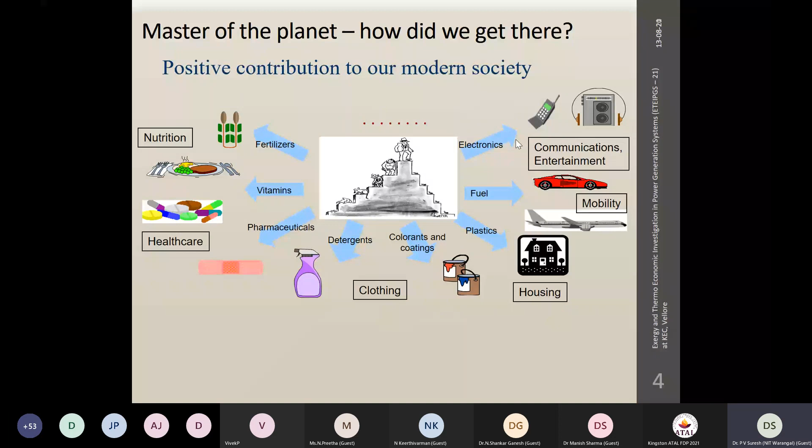And then in terms of automotive mobility, we have developed cars, airplanes, and all those things. And then we have excellent communication among us—there are so many things we have developed in communication and entertainment. So if you take all this, there is a good amount of positive contribution to our modern society.

So now, because of all these contributions provided by humans, we are on top now. But then what are the problems, or what are the challenges that are being faced by us now? How do we face those problems? Let us quickly look at those problems.

It is projected that there will be an increase in energy demand by 3.5 times, an increase in electricity demand by 7 times, and an increase in water demand. Because of all this, it is also projected that there will be an increase in greenhouse gas emissions.

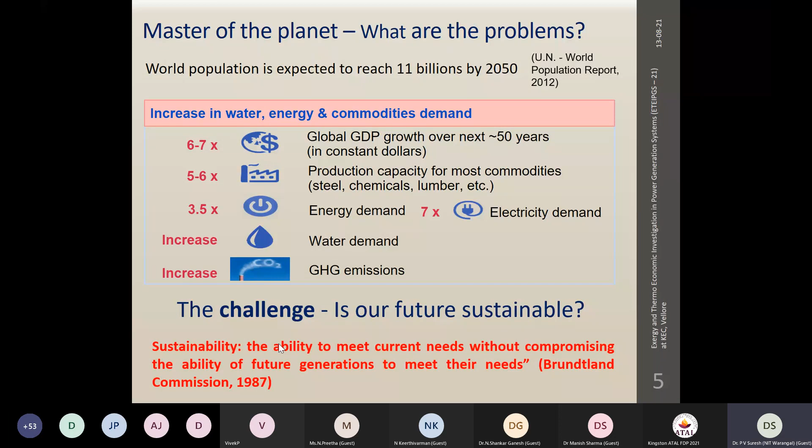Now coming to this point, I'll be mainly focusing on the greenhouse gas emissions and what remedies we can address. Climate change is a major issue which requires immediate attention and suitable remedial measures.

We all know the entire globe is getting warmed, and because of that there are so many consequences. We need to give immediate attention to this problem. CO2 is the major greenhouse gas which adversely affects the environment, though there are many greenhouse gases.

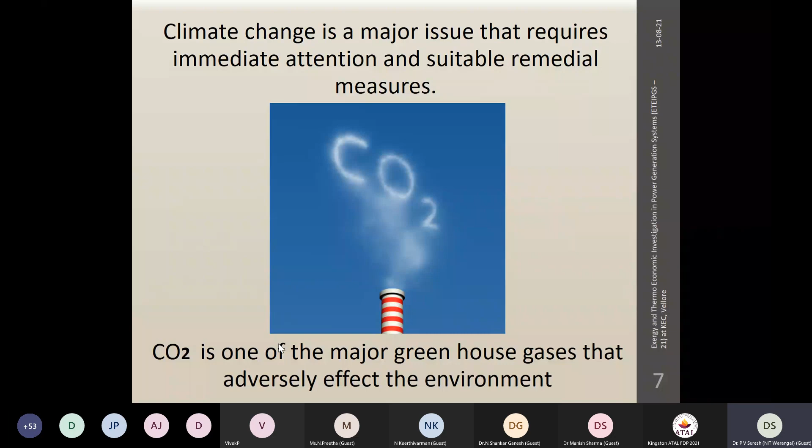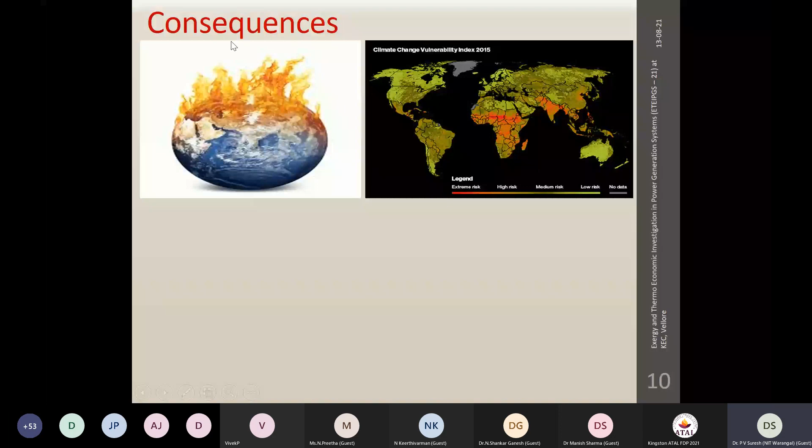So now moving on, we all know there are consequences of global warming. I'm not going to tell you what global warming is, we are all aware of that. The consequence of global warming is that the temperature of the earth is getting increased day by day.

If you see, these are the surface air temperature contours from 1960 to 2060, which are projected to 2060, and this is a climate change vulnerability index. Unfortunately, India is also coming into this region of red, or more extreme risk to high risk zone.

We can see 17 of the top 18 warmest years occurred since 2000, and 2016 and 2019 are the first and second warmest global years on record since 1880. Unfortunately, we have seen those years, and we should not wish our future generations to witness these kinds of effects.

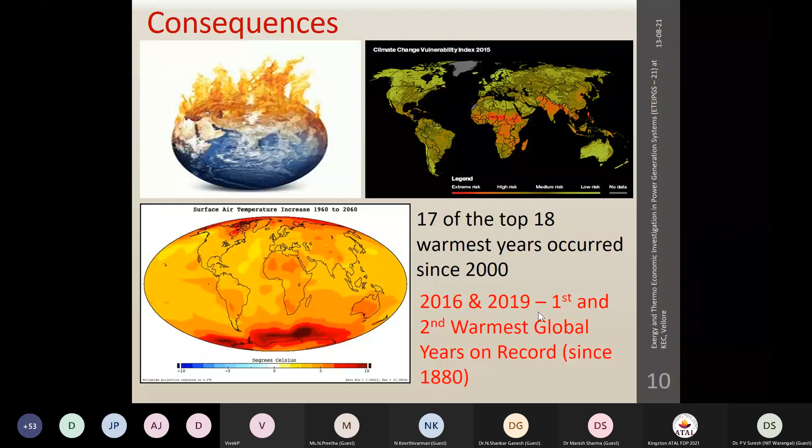And what are the ill effects of this global warming? These are some examples: we have seen extinction of species, droughts, floods in some areas, and uneven seasons. The probability that these changes occurred by chance is virtually zero.

But because of all our acts, because of greenhouse gas emissions into the atmosphere and because of our problems, the entire nature is getting affected, and all the species are getting affected.

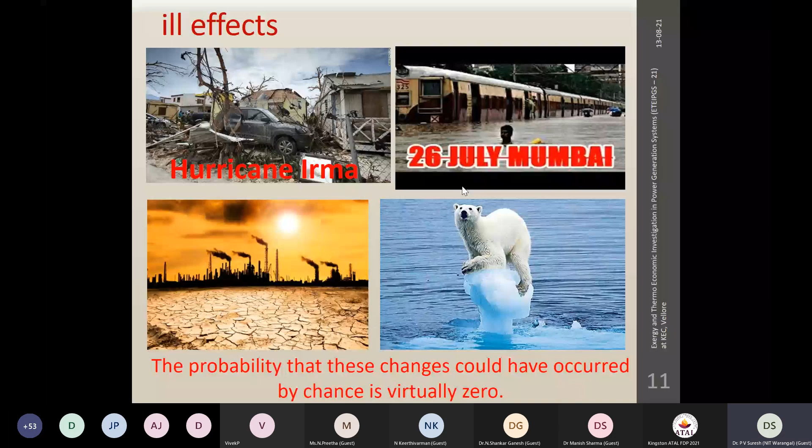Global warming by greenhouse gases has become a major concern worldwide due to its adverse effect on climate change. Because of the seriousness of this problem, all the countries met in 2015, from November 30th to December 11th, in Paris, in a conference of parties, the COP21 conference. About 195 countries voted to adopt a historic agreement on climate change.

So what is that agreement? They wanted to limit global warming to 2 degrees Celsius by the year 2100. So with compromise and cooperation among all these parties, the countries which met in COP21, this agreement was reached.

Hello, yeah. Any issue?

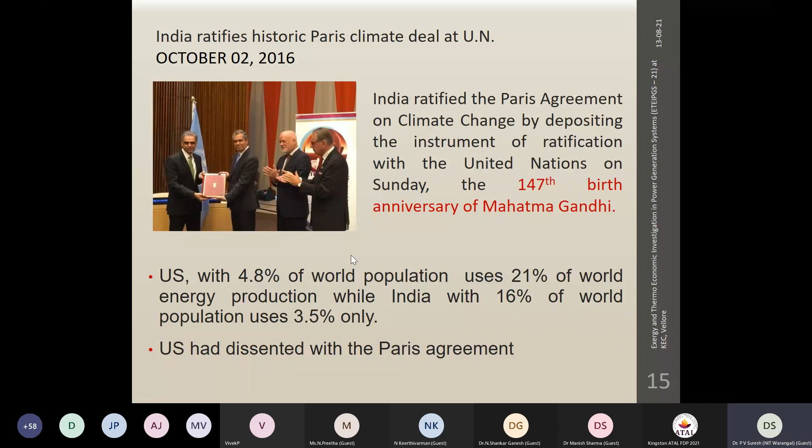So now, in order to achieve this target CO2 emission level of 450 ppm by 2100, how do we achieve these targets? A single strategy may not be sufficient. We need a multi-pronged strategy, which includes application of carbon dioxide capture, sequestration and utilization, CCS and CCU technologies. We have to bring CCS and CCU into reality and then utilize them.

We also look for utilization of alternative energy sources other than coal. We should depend on alternative energy sources such as solar energy, wind power, geothermal, and also renewable energy sources such as biomass and biofuel. There is a huge thrust on going for these energy sources, but they have their own limitations still.

Another strategy is the improvement of process efficiencies to reduce energy consumption. For already existing processes and equipment, we should try to improve the efficiency so that they'll consume less energy. If they consume less energy, then that energy can be utilized for other purposes. So we should design efficient processes that are energy efficient.

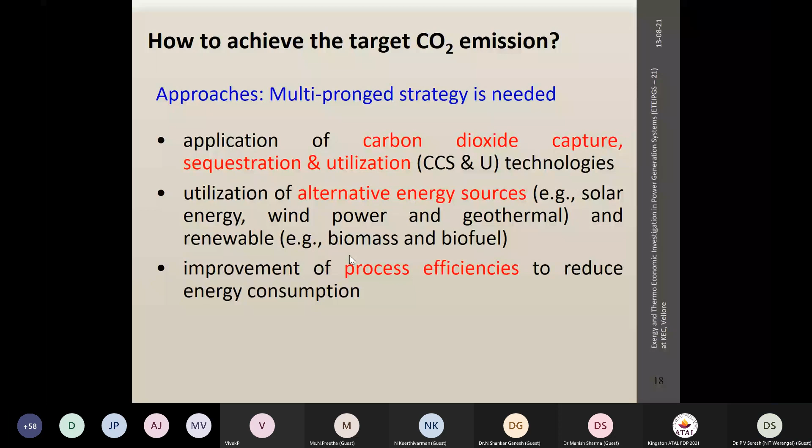So now the motivation for our work is like this. At present, India has vast coal resources, amounting to about 8.3% of the total global coal reserves, and about three-fourths of electricity was produced from coal for the year 2016 to 2017.

As on 31st March 2016, the estimated reserves of coal were about 308 billion tons, with an addition of 2.2 billion tons over the last year. So there is an increase in coal reserves also, and we are leading in coal. We have the highest coal reserves in the world also.

Coal deposits in India are mainly confined to the eastern, southern, and central parts of the country. If you look at the statistics of electricity generation by sources in India during this year, the major chunk of electricity generation is by coal, around 76%. All other renewables and alternative energy sources have contributed around 25% only, less than 25%.

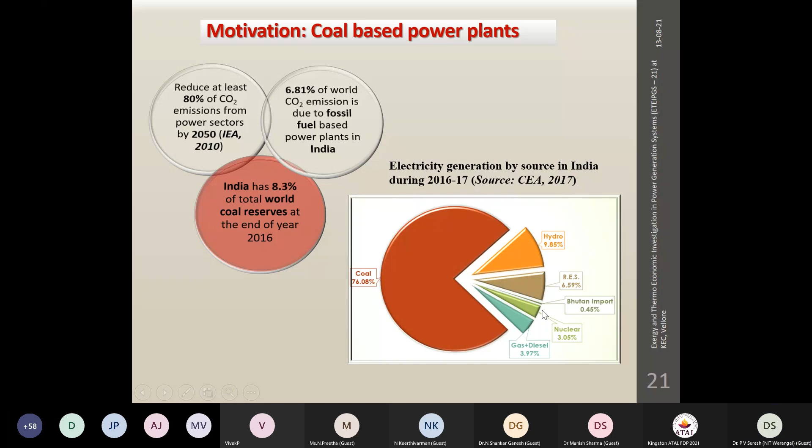As we know, there is carbon content in the coal, so obviously there will be release of CO2. So how do we address this? How do we capture this CO2 that is released from the coal-fired power plants?

At present, there are 3 conventional CO2 capture technologies: post-combustion, pre-combustion, and oxy-combustion. The first one is post-combustion.

What we do here in post-combustion capture is, from the combustion we get flue gas, and the flue gas contains CO2. This CO2 will be captured using post-combustion capture techniques, and then the captured CO2 will be either compressed and stored, sent for sequestration, or if possible, utilized. So after combustion, whatever CO2 is released from the flue gases, we try to capture there. It's a post-combustion technique. These post-combustion capture techniques or units will be integrated with conventional, existing coal-fired power plants.

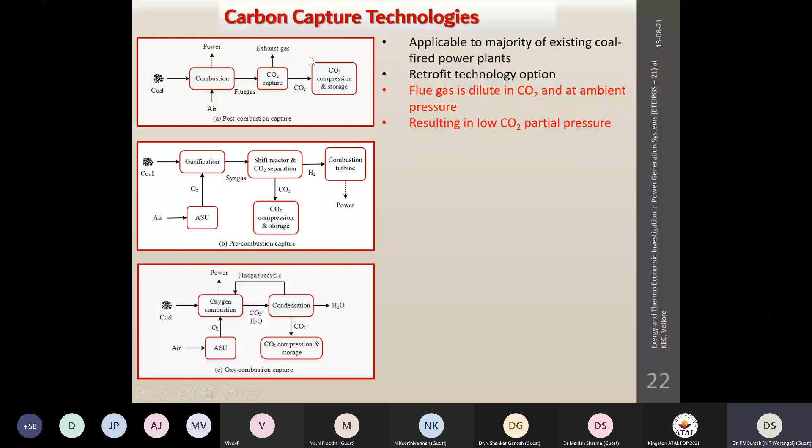So it's a retrofit technology option. But the disadvantages are flue gas is dilute in CO2. So the CO2 that we get from here is in dilute form, and it is at ambient pressure. So it will be very difficult to capture CO2 from this, and it is very energy intensive. This results in low CO2 partial pressure, because the concentration of CO2 is less, the partial pressure of CO2 is less. Because of this, it is an energy intensive or expensive process. You can either use absorption techniques or adsorption techniques here, so many techniques are being attempted.

Next, pre-combustion capture. In pre-combustion capture, what we do is combust coal with pure oxygen. There will be a gasification step here. Coal will be gasified by supplying pure oxygen, and the syngas we get from this will be sent to a shift reactor, where the CO in the syngas will be converted to CO2, giving CO2 and H2. You can easily separate CO2 from H2 using any CO2 separation unit, and then hydrogen goes to the combustion turbine for power production, and this CO2 will be sent to sequestration after compression.

So here you'll get synthesis gas concentrated in CO2 and at high pressure. That's the advantage, and it is applicable mainly to new plants, not existing plants. As few gasification plants are currently in operation, the barriers to commercial application of gasification plants are common to this capture technology also. And the cost of equipment and extensive supporting systems required are disadvantages.

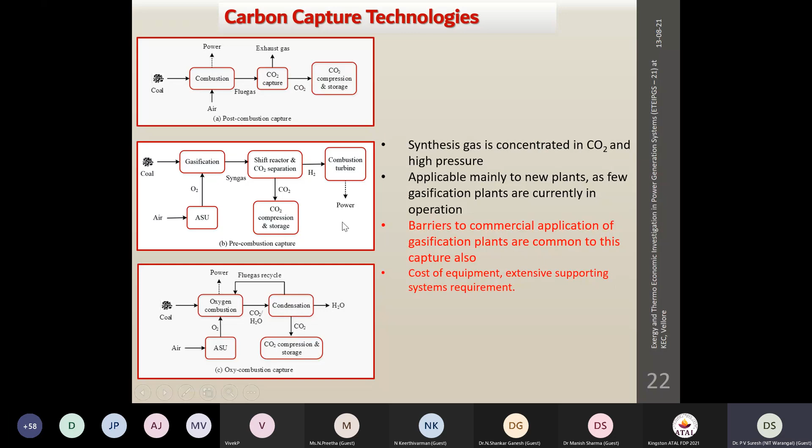So that's the disadvantage. Another capture technology is oxy-combustion. Here you require pure oxygen. How do you get pure oxygen? Pure oxygen is not readily available, you have to either get it from air or from water. So again, you require an air separation unit, which is again an energy intensive process.

So another capture technique is oxy-combustion capture. Again, this requires pure oxygen, and the coal will be directly combusted here using oxygen. So there won't be any syngas production or gasification here. It is directly combusted, and you will get CO2 and steam, and there will be a rich form of CO2 coming out from the oxy-combustion unit. This can be easily separated, as the steam can be condensed and CO2 separated. This CO2 can be sent to compression or sequestration and further utilization.

So it is very high CO2. The advantages of this technology are very high CO2 concentration in the flue gas, and it's a retrofit and repowering technology option. The downside, you require a large amount of oxygen here, and large cryogenic O2 production requirement may be cost prohibitive. It is a costly and energy intensive process, and cooled CO2 recycle is required to maintain temperatures within the limits of combustor materials.

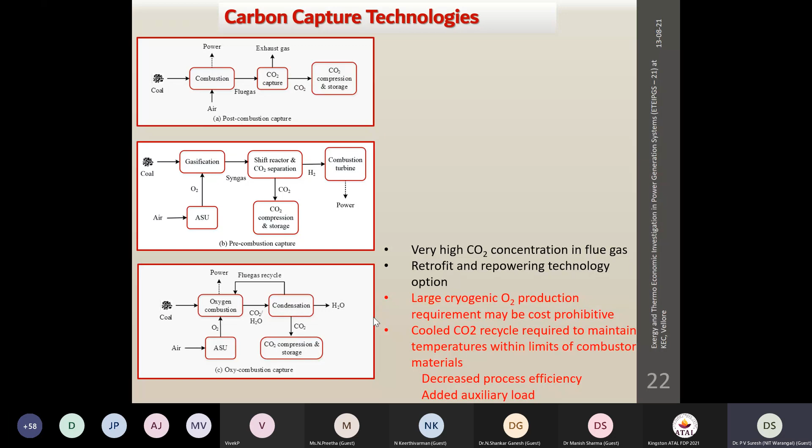So though these technologies result in attractive CO2 reduction by capturing them and not releasing into the atmosphere, they are associated with huge energy penalties. The post-combustion capture for conventional coal-fired power plants results in around 7 to 10% energy penalty for 85% CO2 capture efficiency. Whereas pre-combustion and oxy-combustion, the other two technologies for conventional integrated gasification IGCC plants, have resulted in around 7% and 9% energy penalties for CO2 capture efficiency. So they are somewhere around 7 to 10% energy penalty in the energy efficiencies.

So what we need is a CO2 capture technology with lower energy penalty, and that will become a more viable option than these three technologies. In this context, chemical looping combustion is very attractive, because it captures most of the CO2 emitted from the power plant at a lower energy penalty compared to these conventional CO2 capture techniques. So chemical looping combustion shares the advantages and disadvantages of these two capture techniques, post-combustion and oxy-combustion capture.

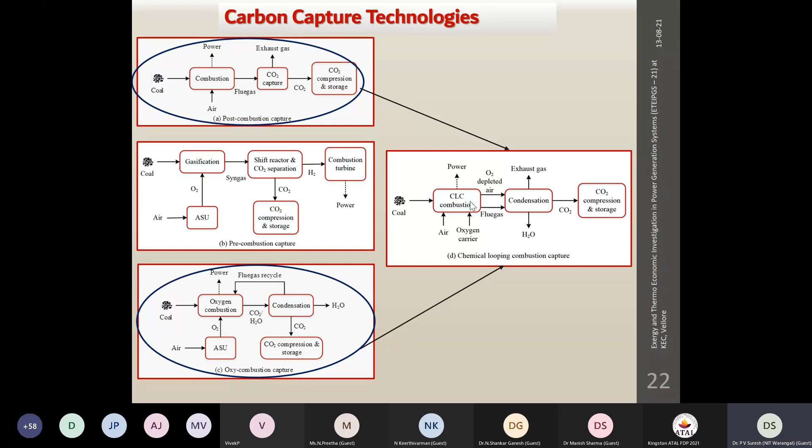The reduced metal oxides, so Fe2O3, because of release of oxygen in the fuel reactor, becomes Fe3O4 or FeO, and these reduced metal oxides are sent to the air reactor, where air oxidizes them back to Fe2O3. These Fe2O3 are then sent back to the fuel reactor.

So you get nitrogen, avoiding NOx and other gases along with the combustion products. That's the main advantage. There is no direct contact between the fuel and air here; they are in indirect contact. Because of that, you get a concentrated CO2 stream along with steam, which can be easily separated. That's the main advantage of this technology.

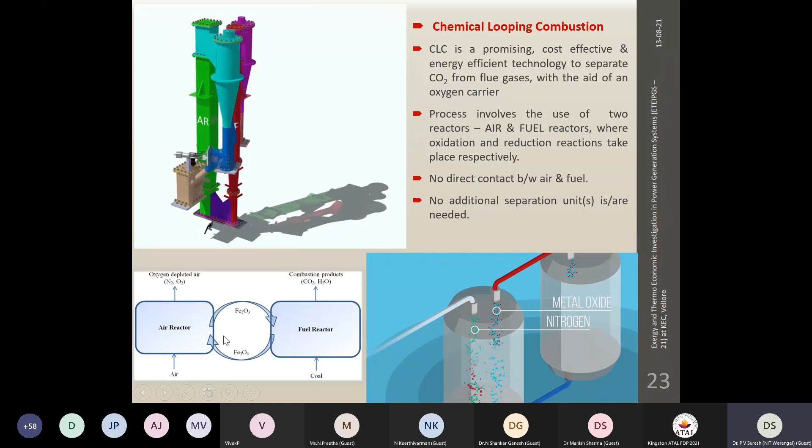The process involves the use of two reactors, air and fuel reactors, where oxidation and reduction reactions take place respectively. In the fuel reactor, reduction reactions take place, and in the air reactor, oxidation reactions take place, and there are no additional separation units required in this process. I hope this is clear.

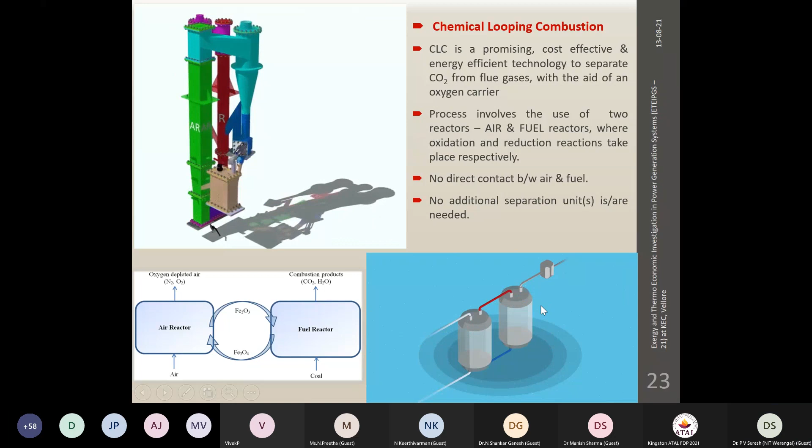So that's the CO2 capture technique we use here. As I said, it is very attractive and captures almost 100% of the CO2 from the power plant at a lower energy penalty compared to previous techniques. I'll also show you some analysis we've done after integrating this technique, to see how much energy penalty there will be.

Moving on, we have also tried to integrate this CLC, chemical looping combustion, under three steam boiler conditions: subcritical coal-fired power plant, supercritical coal-fired power plant, and also ultra-supercritical coal-fired power plant. We all know our Indian coal has a lower calorific value compared to some low ash content coals abroad.

Our coals are mainly high ash content, which reduces the net efficiency of the power plant as compared to low ash content coals. So one way of increasing this net plant efficiency is by adapting advanced power plant technologies such as supercritical and ultra supercritical plants.

Nowadays, we know even across the globe, most power plants are based on subcritical conditions. Only about 22% are based on supercritical and 9% are based on ultra supercritical plants.

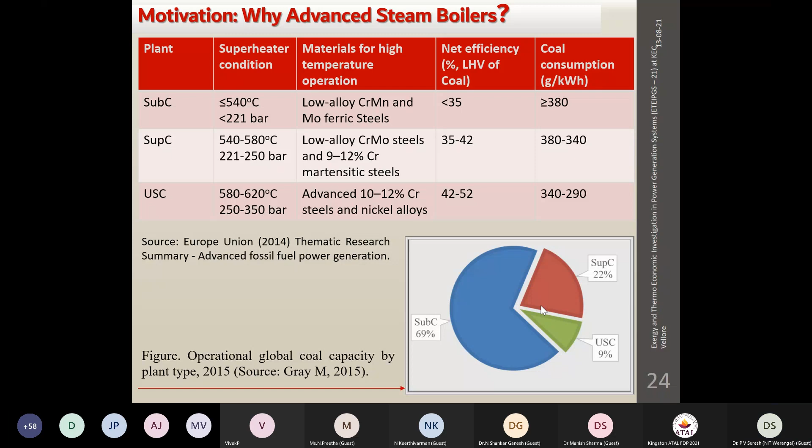To come up with a comprehensive analysis, a sustainable assessment, we have tried to study the feasibility of integrating chemical looping combustion into subcritical, supercritical, and ultra supercritical coal-fired power plants. To analyze the performance, we have taken 4 yardsticks: energy analysis, exergy analysis, ecological analysis, and economic analysis. We have done all this 4E analysis for sustainable assessment of the feasibility studies.

Why are all these 4 required? Energy analysis gives the efficiency of energy utilization, but it does not provide information about sources of losses.

Whereas exergy analysis provides the location of actual losses. That's why these analyses are complementary in nature. Energy and exergy are complementary, and hence these are equally important.

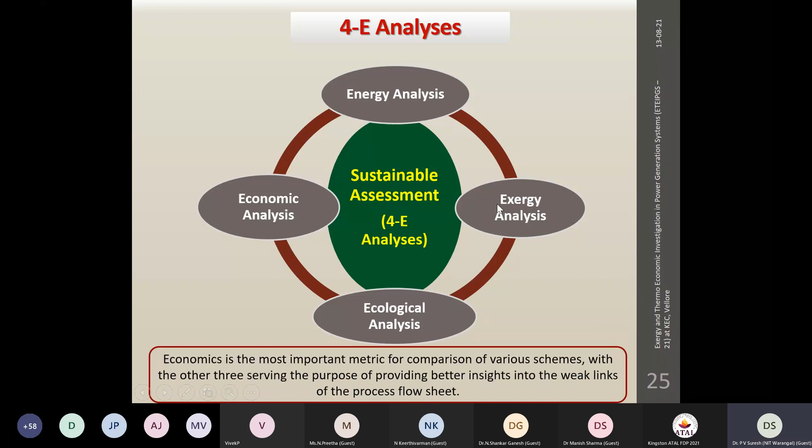I'll not go into the details. As I said, energy analysis gives the efficiency of energy utilization. You all know what exergy is and what energy is. Energy analysis does not provide information about the sources of losses, whereas exergy analysis provides the location of the actual losses. So if you can find out which unit is the culprit, you can try to modify that unit and improve it, which ultimately results in overall improvement, rather than concentrating on a unit which does not affect the overall efficiency much.

So energy analysis is like testing with a stethoscope. You'll only get a feeling of whether you are good or not, whether you are feeling good or bad. So what is the heart rate, and that's it. If there is something abnormal found by this energy analysis testing, what a doctor does is prescribe further analysis—he may ask you to go for an X-ray, a 2D echogram, or an ECG, and so on. That is something like exergy analysis, which will actually tell you the actual source and location of the problem.

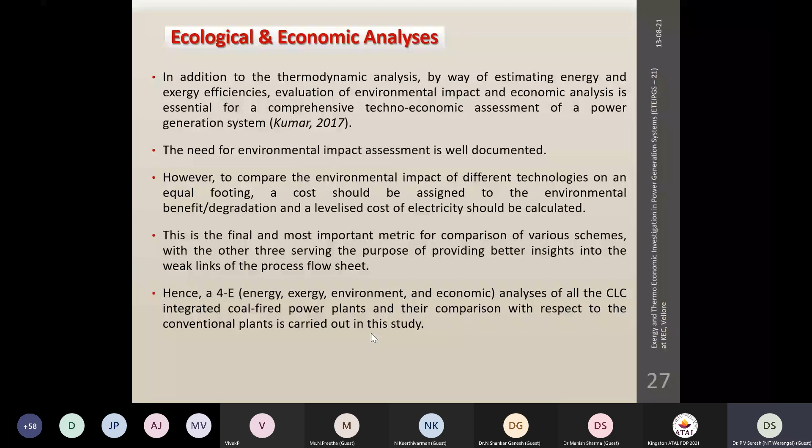So that's this. And as I said, in addition to energy and exergy, ecological and economic analysis are also very important. Hence, a 4E analysis of all these chemical looping combustion integrated coal-fired power plants and their comparison with respect to the conventional coal-fired power plant is not available, and that's what we have targeted.

So one of the problems that we addressed is this, and that's what I'm going to discuss here: 4E analysis of chemical looping combustion based Indian coal-fired power plants under different conditions for efficient CO2 capture.

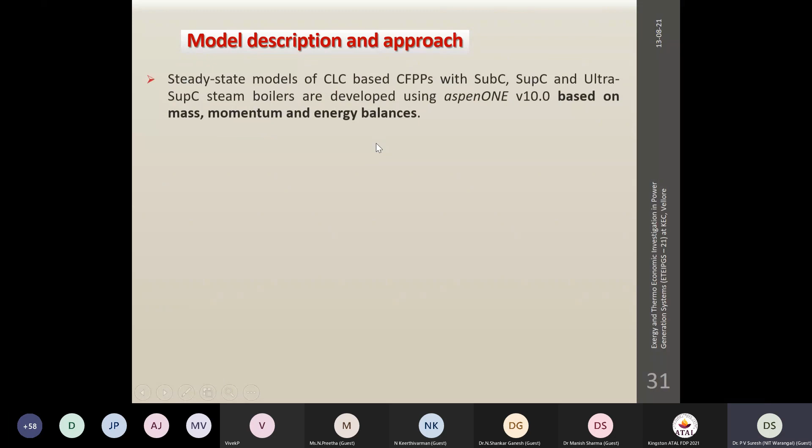The methodology we adopted is that we used Aspen Plus to simulate the overall plant. We have done plant-wide simulations for all three conditions. For the conventional case, we have taken 6 different cases. The first case is a subcritical coal-fired power plant without any capture, which we have taken from NTPC—from a source in the literature that used the NTPC power plant configuration. We have taken the same configuration.

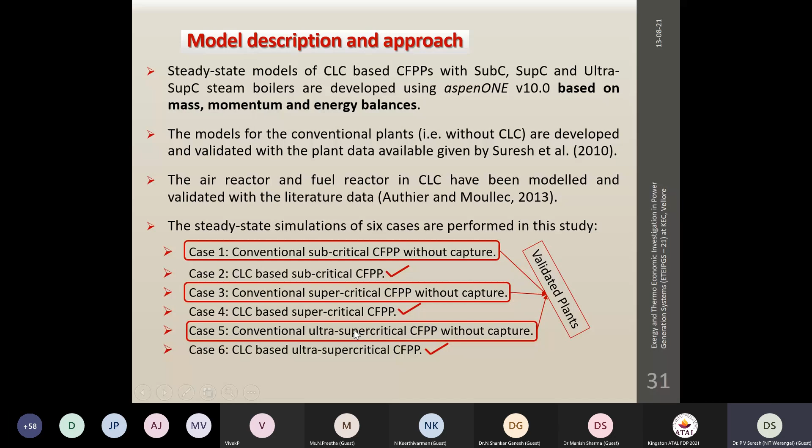So we have the conventional subcritical coal-fired power plant without CO2 capture, and then we integrated CLC into it. We also simulated a second case: CLC-based subcritical coal-fired power plant. Then we moved to a conventional supercritical coal-fired power plant without CO2 capture, which is also validated with the literature, and then integrated CLC with the supercritical coal-fired power plant. Finally, we went for ultra-supercritical conventional as well as CLC-based ultra-supercritical coal-fired power plants. We simulated all these power plants with conditions for subcritical, supercritical, and ultra-supercritical as taken from the literature.

Now, description of these power plants. In the conventional coal-fired power plants, what we do is take coal, do some pre-processing to get dry coal, and send it to the combustor, with air also supplied to the combustor. We get hot flue gases, and these hot flue gases are sent to the HRSG section—heat recovery steam generation section—where steam is generated by utilizing heat from the hot flue gases. Water is sent here to generate steam, and this steam, taken at high pressure, intermediate pressure, and low pressure, is sent to steam turbines to obtain power. This is the actual conventional coal-fired power plant.

Now, after extracting the heat from the hot flue gases, what are we doing? We are just releasing this flue gas into the atmosphere. So there is no capture unit here.

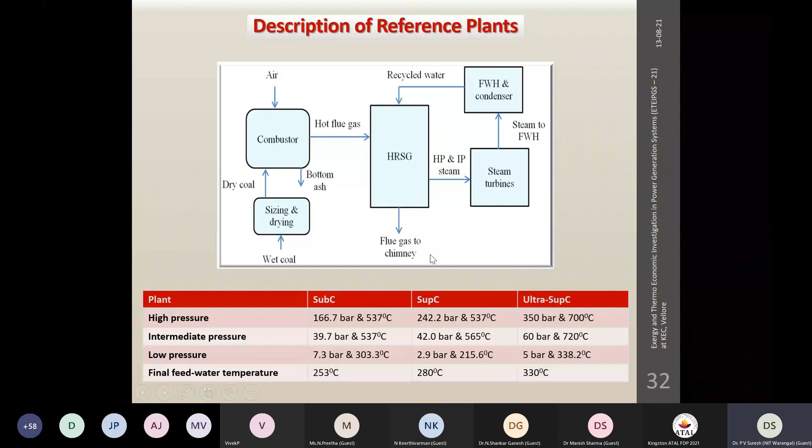Now, what modification have we proposed in the CLC-based coal-fired power plants? This combustor unit—the entire combustor unit—is being replaced with a combination of two reactors: an air reactor and a fuel reactor. Usually these reactors are fluidized bed reactors, so coupled fluidized bed reactors or circulating fluidized bed reactors. The air reactor is a fluidized bed reactor, the fuel reactor is a fluidized bed reactor, and both are coupled.

Now, to the fuel reactor we'll send Fe2O3, which is the metal oxide shown here. There are different types of metal oxides tested in the literature—more than 800 prepared, with different synthesis processes, because the heart of the process is the metal oxide. So we should have better life of metal oxides for the overall efficiency of this configuration or process.

The Fe2O3 will be sent to the fuel reactor, where the coal will also be sent. The oxygen from the Fe2O3 will be utilized for combustion of the coal, and this Fe2O3 will get reduced. The reduced metal oxide Fe3O4 has gone to the air reactor, where air is sent, and because of this air, the Fe3O4 gets regenerated, forming Fe2O3, which will be sent back to the fuel reactor.

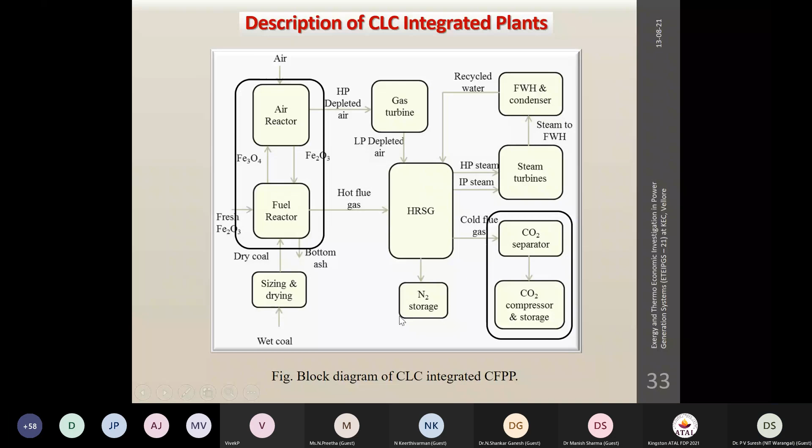The cold flue gas coming out from the HRSG will contain steam and CO2 that goes to a CO2 separator, which is a simple condenser that can condense steam, and you'll get CO2. This CO2 will go to a compressor for storage or sequestration, or you can further utilize it. So that's the scheme that is proposed.

And this is the configuration here—this is the subcritical coal CLC-based chemical looping combustion based subcritical coal-fired power plant. These are the air reactor and fuel reactor, and there are high pressure, intermediate pressure, and low pressure turbines, along with feed water heaters. All these things are simulated using Aspen Plus.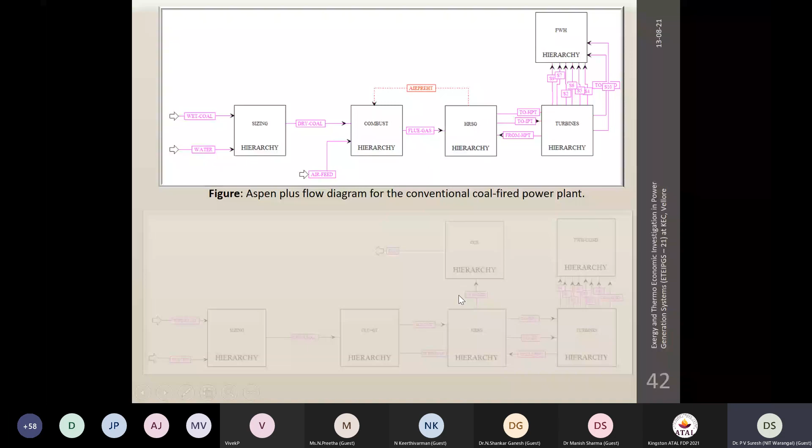In the CLC-based coal-fired power plant, the modification we have done is we have replaced the combustion unit with a CLC-gas turbine combination. In the conventional coal-fired power plant there is no CO2 capture, whereas here the cold flue gas coming out from the HRSG is sent to a condenser and then to a compressor—that's why we have used a CCS unit here. So these are the two modifications we made.

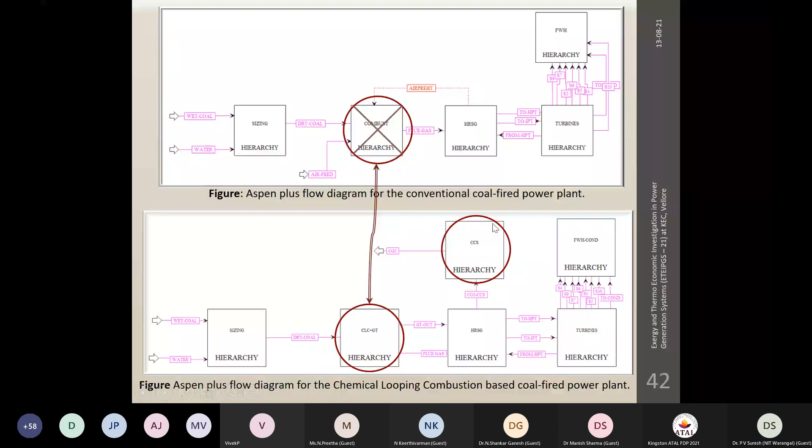This CLC is simulated with two reactors, air reactor and fuel reactor. And this is a separator with a turbine, compressor, and CO2 compressor. So these are some of the conditions that we have used.

Some of the operating parameters of the fuel and air reactors are optimized. We have carried out sensitivity studies to find out the optimum temperature and pressure of operation, and these are some of the conditions and some of the models.

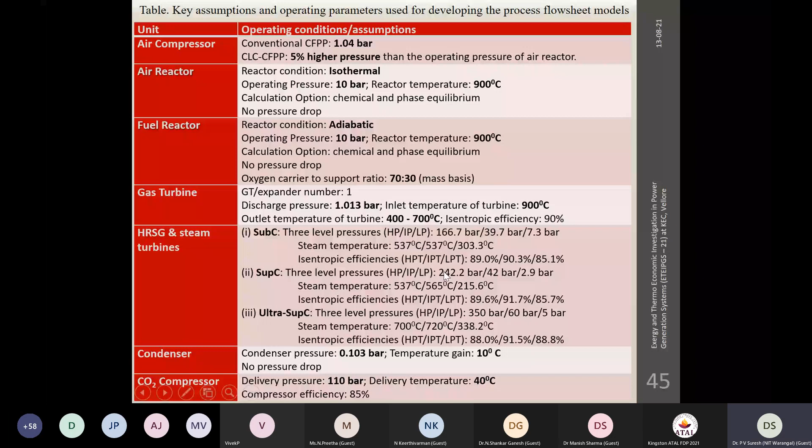The limitation of this work is that the models we have used in Aspen Plus are equilibrium-based models. They are not realistic—they won't give you a complete picture of the real model, but they are based on equilibrium-based conditions. So they are conservative; they'll give slightly higher estimates, but still we'll get an overall idea of the efficiencies.

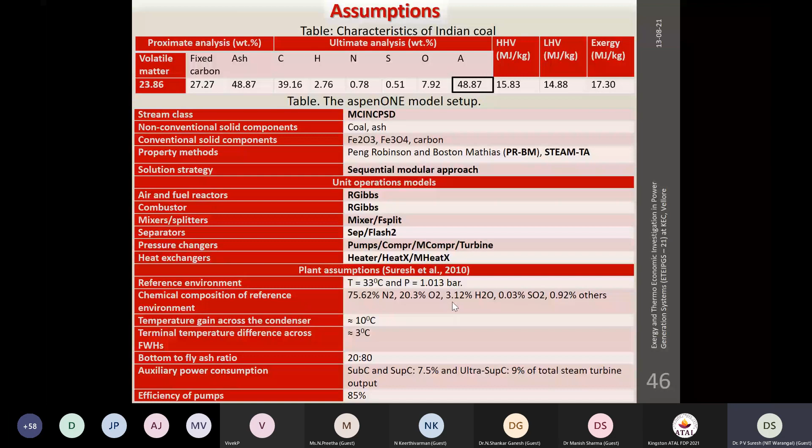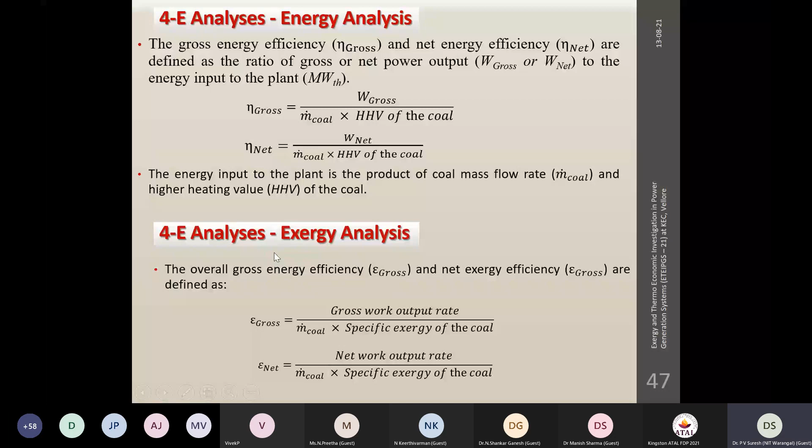As I said, we have done this 4E analysis. We try to calculate the overall energy efficiency, net and gross efficiency, and net exergy efficiency, gross exergy efficiency. In addition to calculating overall gross and net exergy efficiencies, we also try to calculate individual unit-wise exergy efficiencies to find out where the exergy destruction or loss is more, so that from the analysis we can further use that information to improve the overall exergy efficiency of the plant.

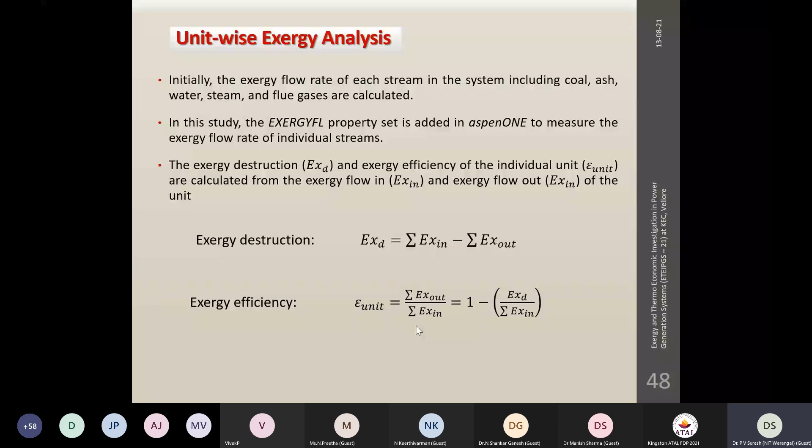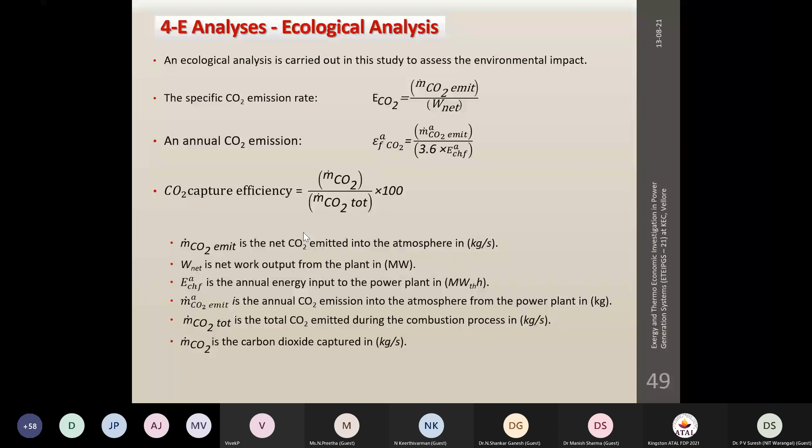So we also have, as I said, the ecological analysis. We try to calculate what is the amount of CO2 that is liberated, what is the specific CO2 emission rate, and what are the annual CO2 emission rates from the power plants, and how much CO2 is captured from the power plant. So how much emission of CO2 is being avoided because of this capture. That's what we try to calculate.

And as I said, we have also done some preliminary economic analysis. We try to calculate the total capital costs and operational and maintenance costs of different equipment. Of course, the cost figures obtained are not absolute, mainly because of the data that we have. There are uncertainties in the equipment cost data, uncertainties in the values of oxygen carriers and other prices, fuel prices, and uncertainties in the values of capacity factors available in the literature. Also, we cannot include all the small minor equipment, so some of it is excluded.

So because of all those things, the figures may not be very accurate, but they give a rough estimate. There can be some uncertainty in the overall cost calculations. So the results obtained can be used to study the potential and economic feasibility of CLC integrated plants against conventional technology. All those uncertainties are common in conventional plants as well as in CLC based plants. So if you ignore these things, you can compare conventional coal-fired power plants against coal-fired CLC-based power plants on an equal footing. That's the idea.

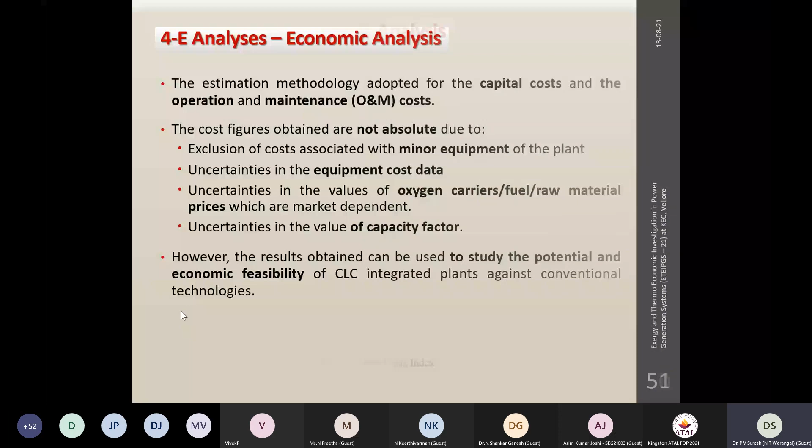So this is how to calculate all this, it's already available in the literature, you can see. As I said, to have a common factor, we try to calculate the levelized cost of electricity. We ultimately are getting electricity from all these 6 cases, so we try to calculate the levelized cost of electricity from all these plants.

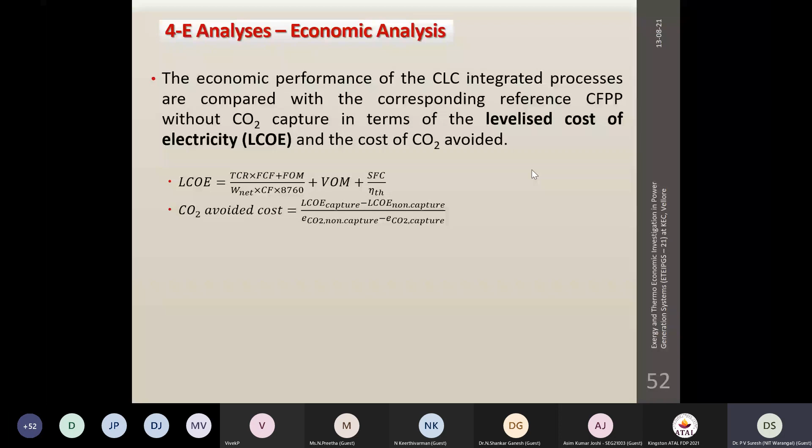We have also calculated the levelized cost of electricity by considering something called the social cost of carbon. The social cost of carbon is a measure of economic detriment from the impacts created by the emission of CO2 into the atmosphere. As we all know, if you just release CO2 into the atmosphere, our country is going to pay a penalty. There is a cost given because of this release of CO2 into the atmosphere. You are actually damaging things, there is a lot of damage happening.

This can cost families, businesses, and governments through increased food prices and other impacts. So all these things are accounted for, and a cost has been defined as the social cost of carbon. In 2018 there was a report by Ricke et al. about the social cost of carbon for different countries, and for India, $86 per ton of CO2 emitted has been given. This social cost of carbon is also considered in our present analysis. So if you release 1 ton of CO2 into the atmosphere, this is the penalty you are going to pay, which ultimately results in an increased levelized cost of electricity. That is also accounted for in our calculation.

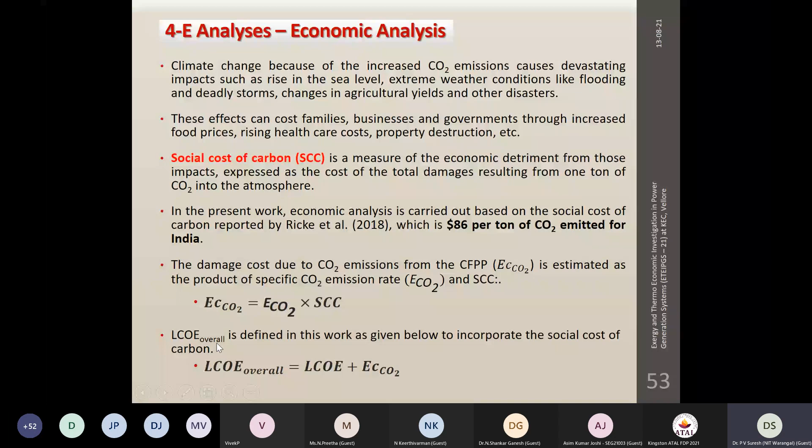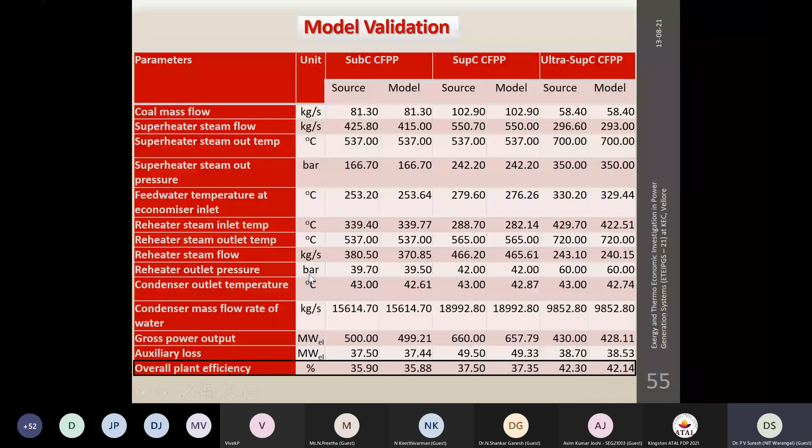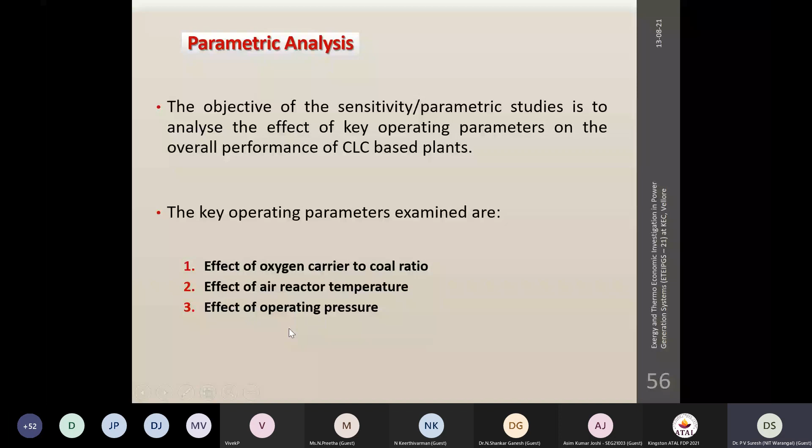And we have done some parametric analysis to study the effect of the oxygen carrier, because we have to send oxygen carriers in the chemical looping combustion - how much of it is required. So we did some sensitivity analysis there, and also studied the effect of air reactor temperature and operating pressure. Finally we fixed all those parameters to 10 bar pressure, 900 degrees Celsius as the air reactor and fuel reactor temperature, and 44.7 as the oxygen carrier to fuel ratio.

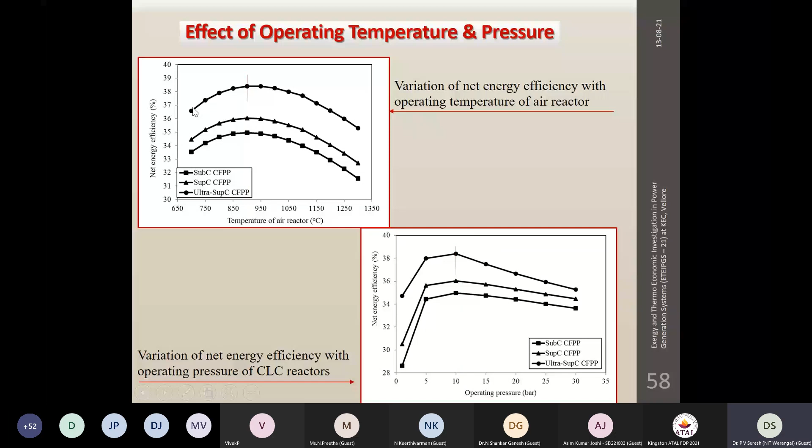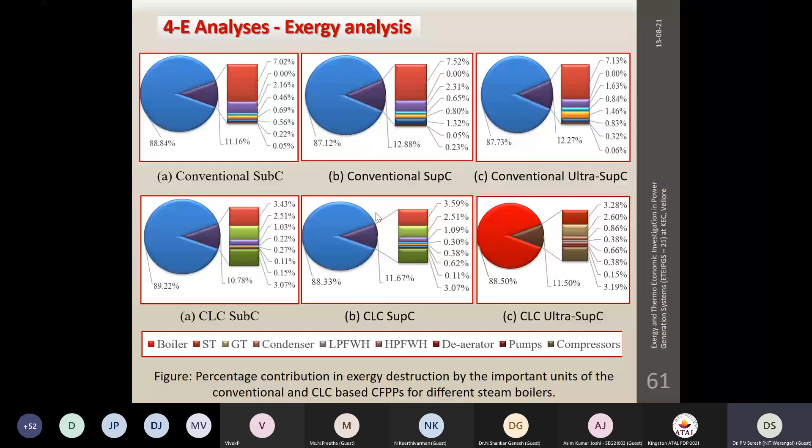So what we can say here is, the same is true for all other cases also: though large amounts of energy are lost in the condensers, the potential to utilize the waste heat energy as useful work is less in condensers, and hence the improvement of efficiencies there is very, very low.

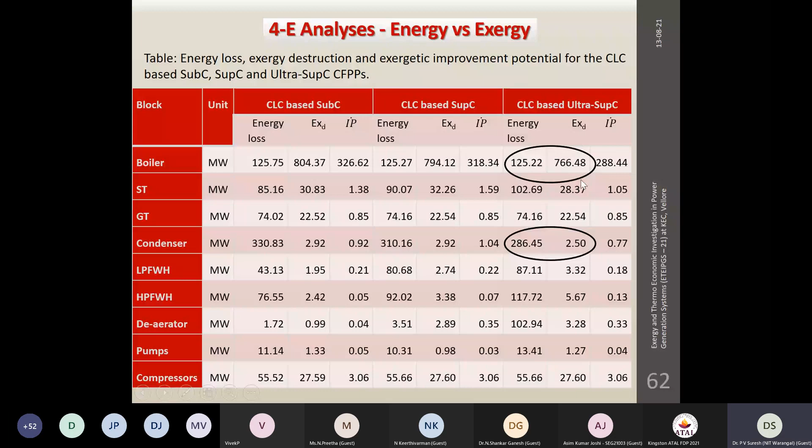If you look at the exergy destruction, you'll be on the right side, and you'll be going in the right direction. So if you can concentrate on working on or improving the boilers further, you'll be improving the overall efficiency of the plant. So that's the insight that we get from studying energy and exergy analysis together.

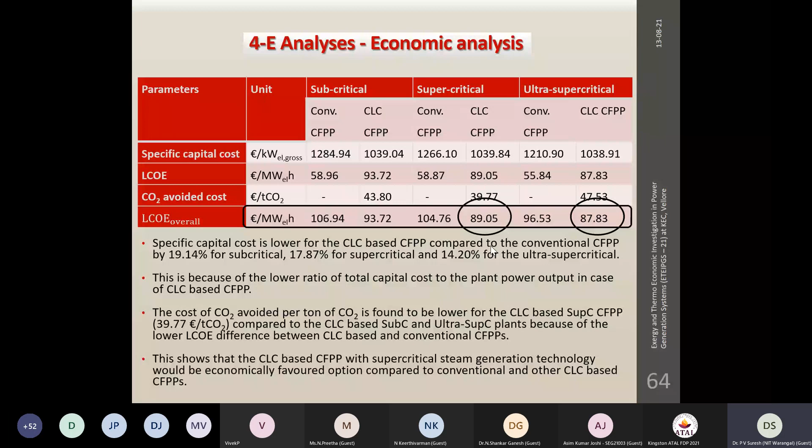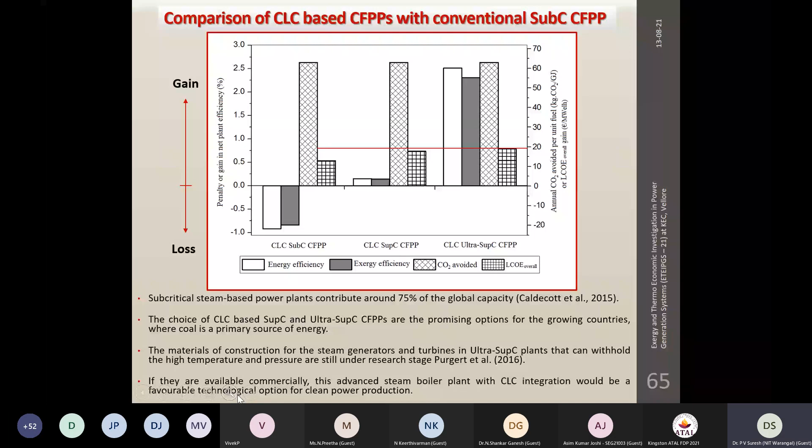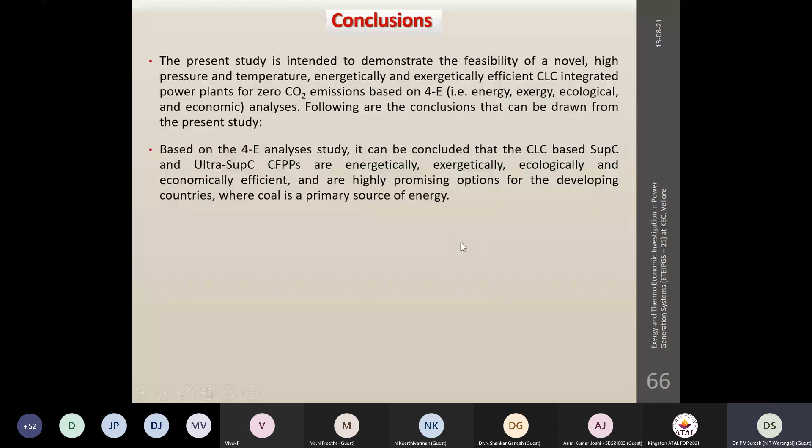We have shown that CLC based supercritical and ultra-supercritical power plants are energetically, exergetically, ecologically, and economically efficient, and are highly promising options for upcoming power plants in the near future. The entire work has been published in Energy Conversion and Management, and we have also extended our work for cogeneration, where hydrogen and power can be generated, which has been published in Energy Journal. That's also available in the literature.